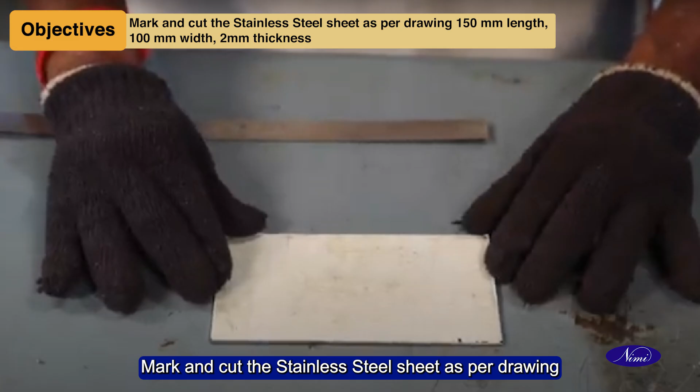In this topic, we will learn about how to deposit bead on stainless steel sheet in a flat position. Objectives. At the end of this exercise, you shall be able to mark and cut the stainless steel sheet as per drawing: 150 mm length, 100 mm width and 2 mm thickness.

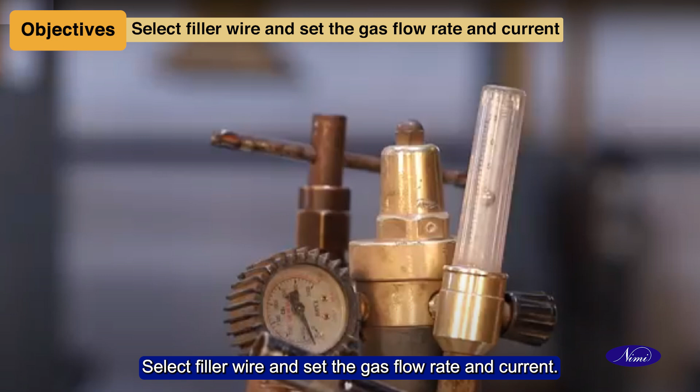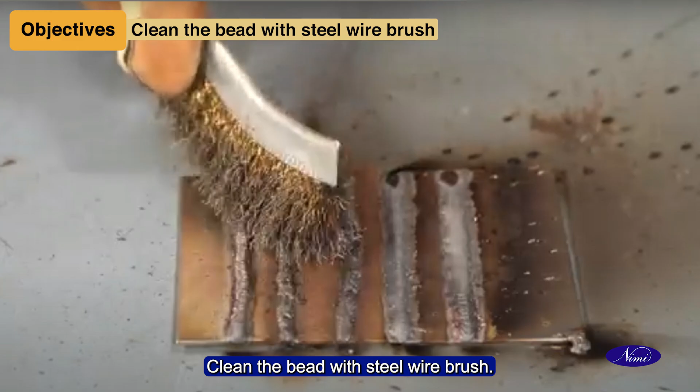Select filler wire and set the gas flow rate and current. Deposit the bead with weaving technique. Clean the bead with steel wire brush. Inspect the weld for any surface defects.

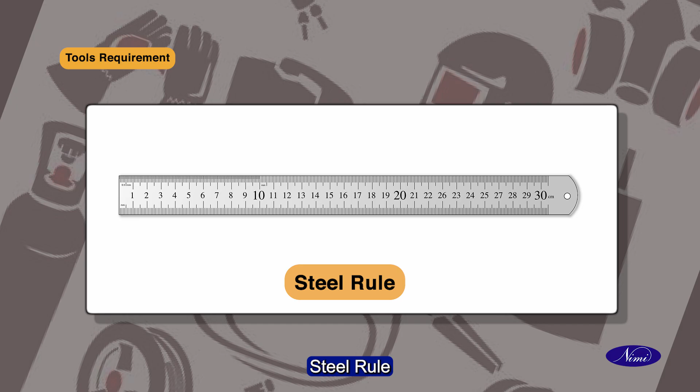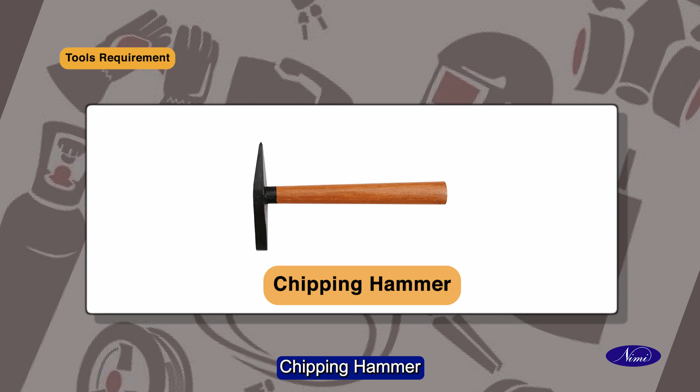Tools required for depositing bead on the stainless steel sheet in a flat position: steel rule, ball peen hammer, half round file, tri-square, tongs, chipping hammer, steel wire brush, personal safety equipment, key or

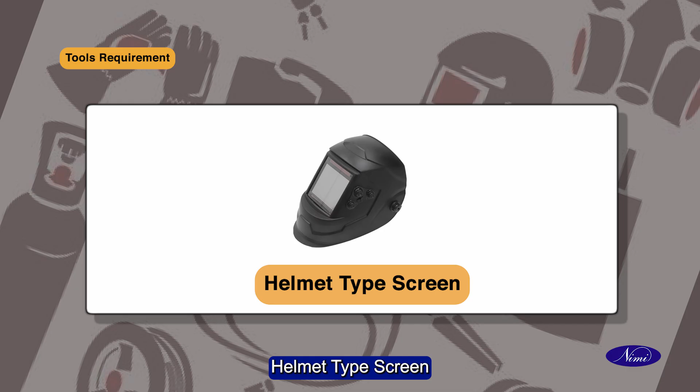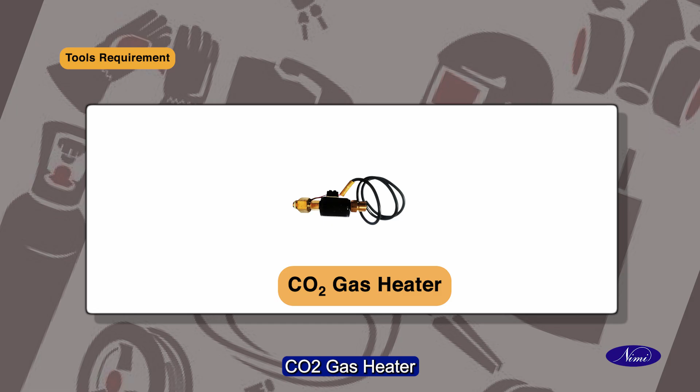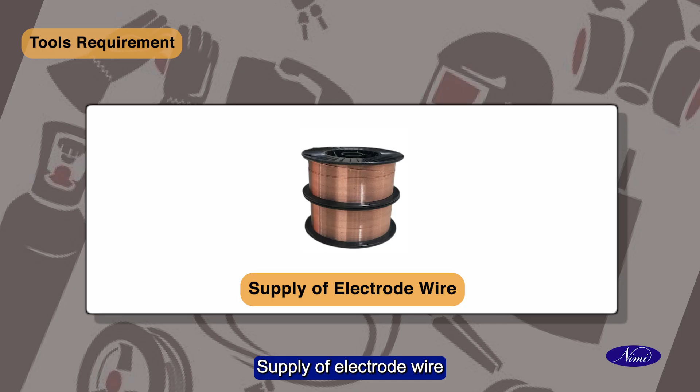spanner, helmet type screen, angle grinder, gas regulator with preheater and flow meter, CO2 gas heater, shielding gas hoses, welding power source, wire feeder, supply of electrode wire, welding gun, shielding gas cylinder, CO2, stainless steel sheet 2 mm thickness.

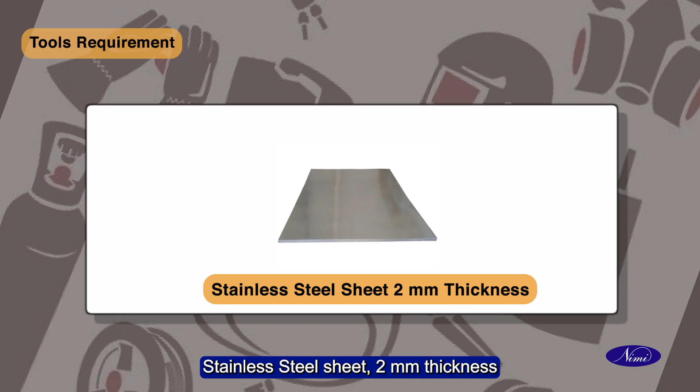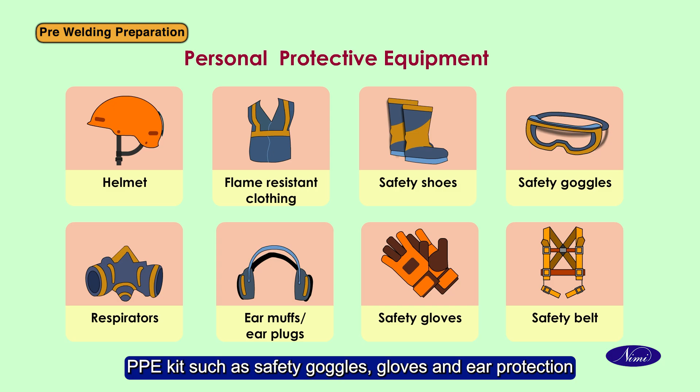Now, let us see the preparations for depositing bead on the stainless steel sheet in a flat position. Pre-welding preparation. Wear appropriate personal protective equipment, PPE kit, such as safety goggles, gloves and ear protection to safeguard against potential hazards. Ensure you have a well-lit and adequately ventilated workspace.

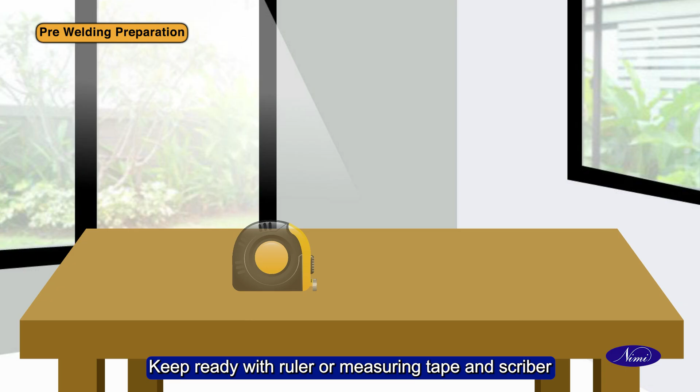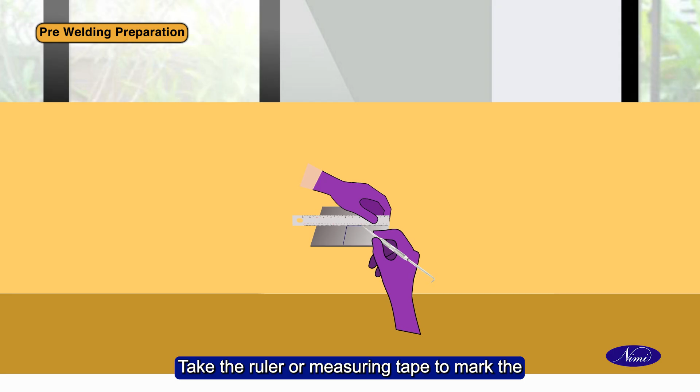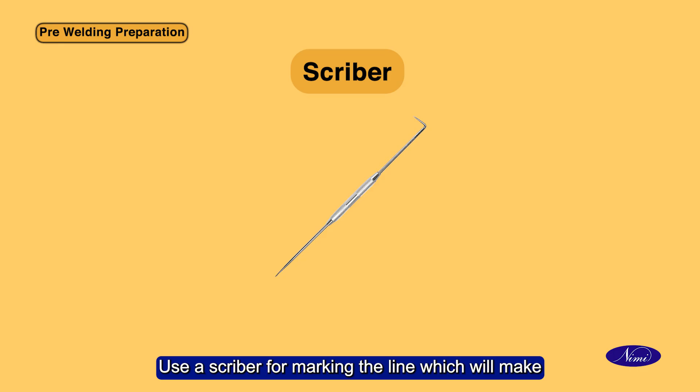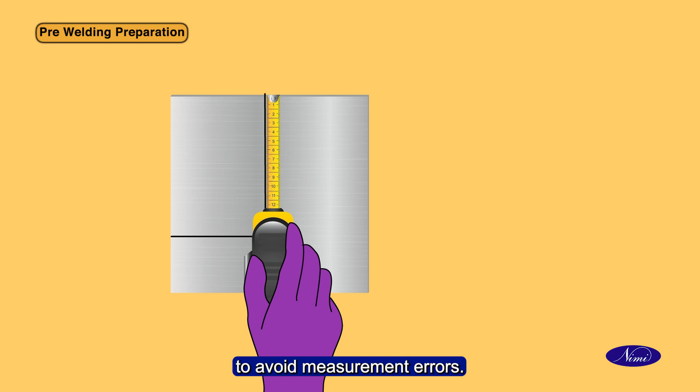Keep ready with ruler or measuring tape and scriber on the welding table for taking measurement for cutting. Take the ruler or measuring tape to mark the desired cutting line, 150 mm length, 100 mm width, accurately on the stainless steel sheet 2 mm thick. Use a scriber for marking the line, which will make a good impression on the 2 mm stainless steel sheet. Double check the measurements to avoid measurement errors.

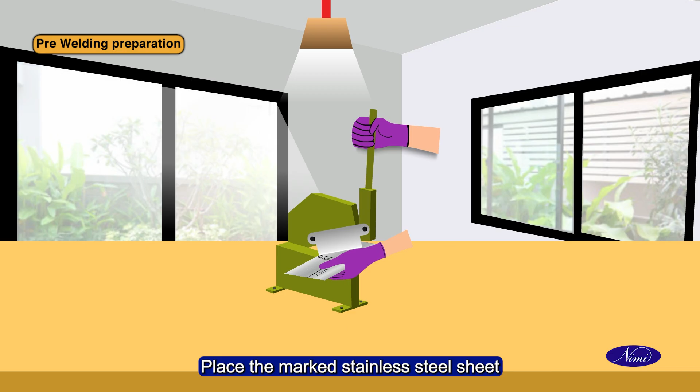Place the stainless steel sheet on a welding table. Place the marked stainless steel sheet on the shearing machine. Keep the hand shearing machine aligned with the marked cutting line as you continue to apply pressure. File rough edges if needed to achieve a clean and even finish.

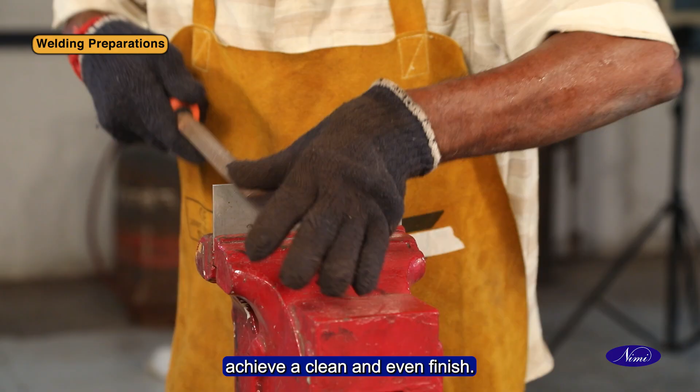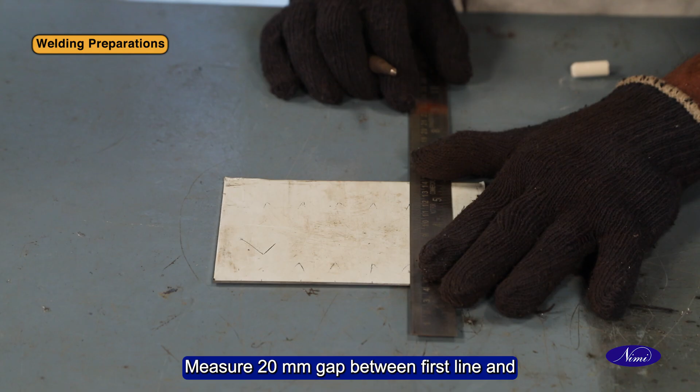Start marking parallel lines by leaving 25 mm on either end of the sheet. Draw the first line using a scriber. Measure 20 mm gap from the first line and mark the second line using a scriber. Follow the same process of maintaining 20 mm gap between lines and draw 3 more lines. Totally 5 lines have to be marked.

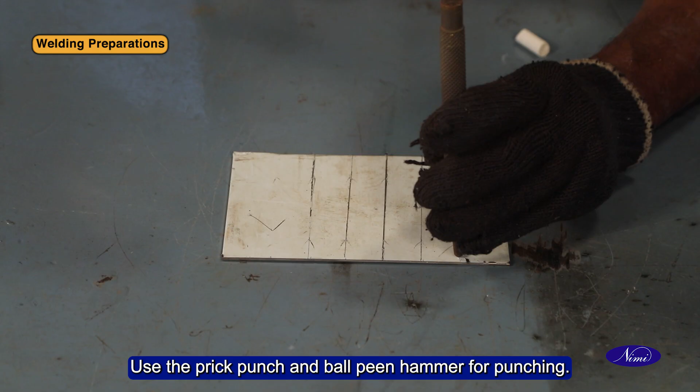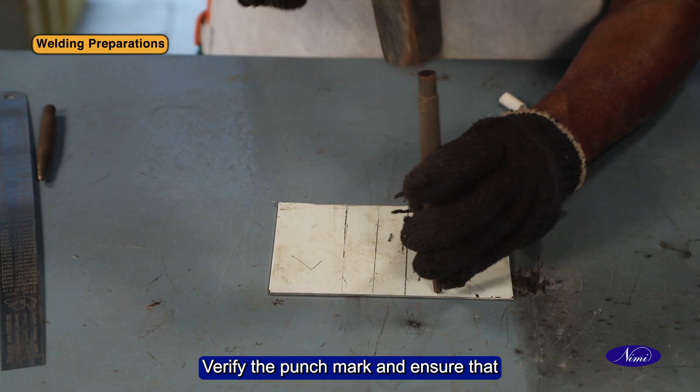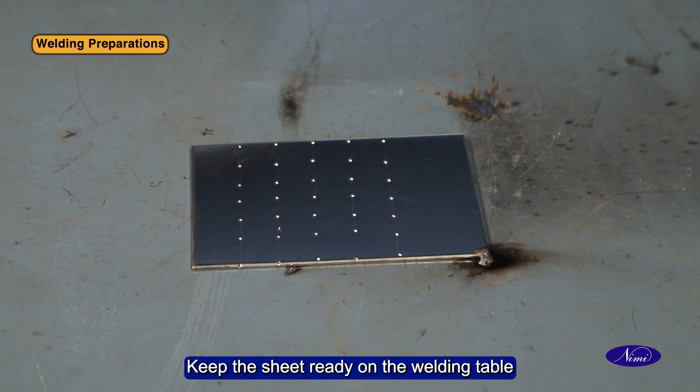Use the prick punch and ball peen hammer for punching. Start making the punch marks using the prick punch and hammer by maintaining a 4 mm gap between the punch marks. Verify the punch marks and ensure that all the punches are made correctly. Keep the sheet ready on the welding table to start the welding process.

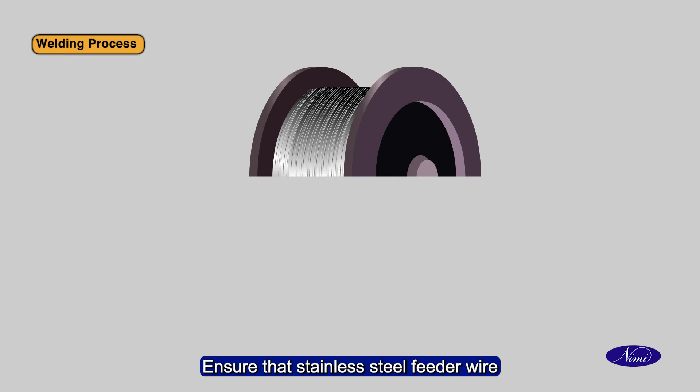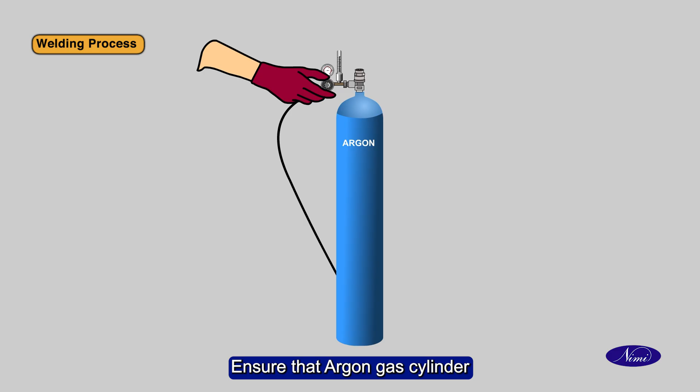Start setting up the GMAW machine. Ensure that stainless steel feeder wire with correct diameter is taken. Fix the 0.8 mm diameter stainless steel wire spool in position, lock it up and pull the wire through the guide tube, rollers, spiral and contact tip of the torch. Ensure that argon gas cylinder is fitted with flow meter.

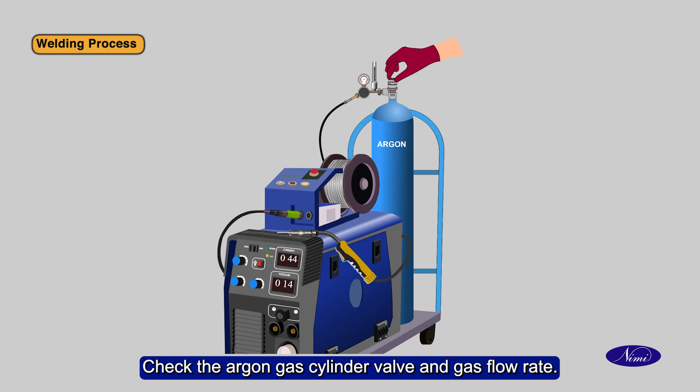First, check the power supply of the GMAW machine. Check the argon gas cylinder valve and gas flow rate. Check the wire feeder machine for the correct speed. Set up the welding torch with accessories.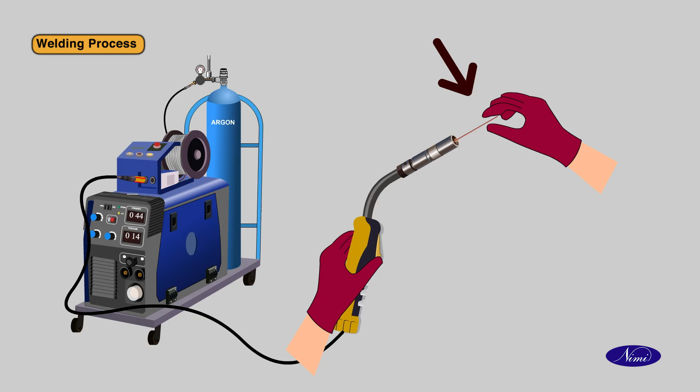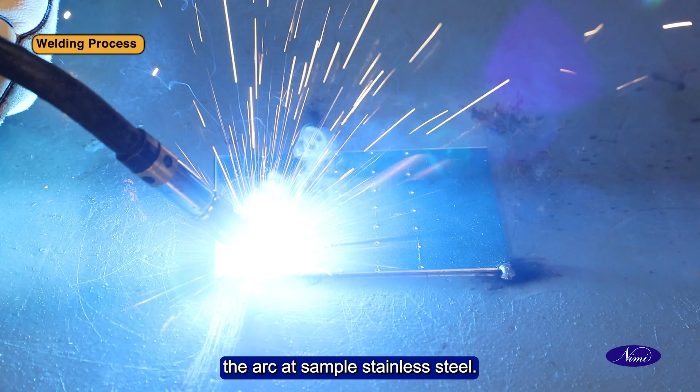Check the filler wire feeder on the welding torch. Ensure that the GMAW machine is working fine. Start the welding process by striking the arc on sample stainless steel. Check the straight bead on the sample stainless steel sheet.

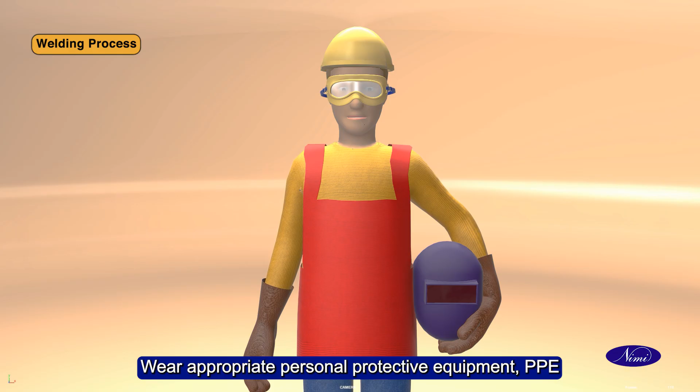Now, let us see the welding process for depositing bead on the stainless steel sheet in a flat position. Wear appropriate personal protective equipment, PPE, such as safety goggles, gloves, and ear protection to safeguard against potential hazards.

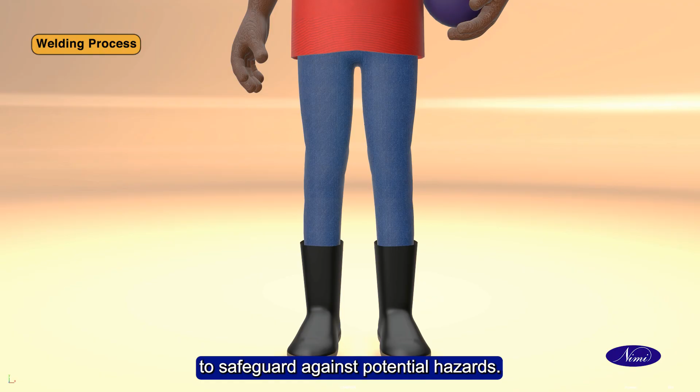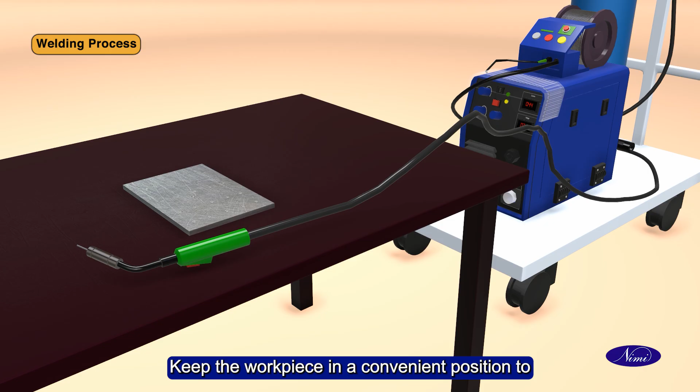Set the workpiece on the work table in a flat position. Keep the workpiece in a convenient position to carry out welding in downhand position.

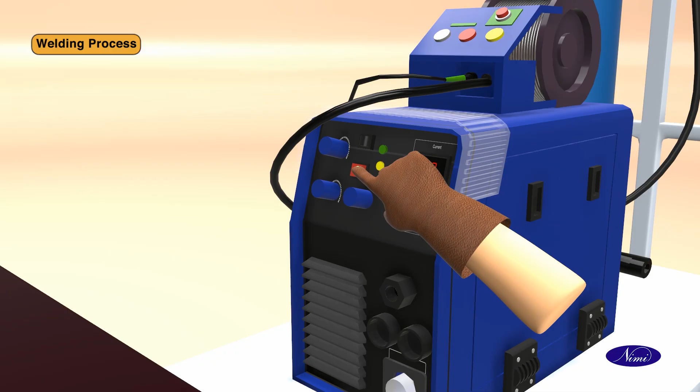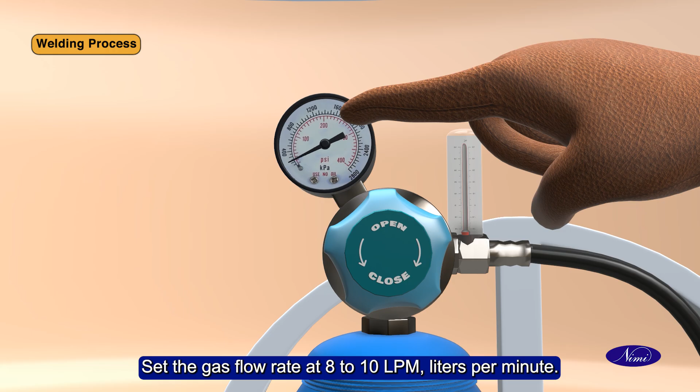Switch on the welding machine. First, check gas flow while starting the welding. Adjust the gas flow according to the specified flow rate. Set the gas flow rate at 8 to 10 LPM, liters per minute.

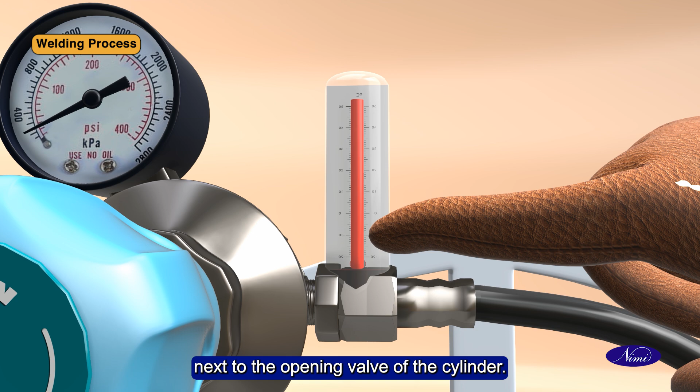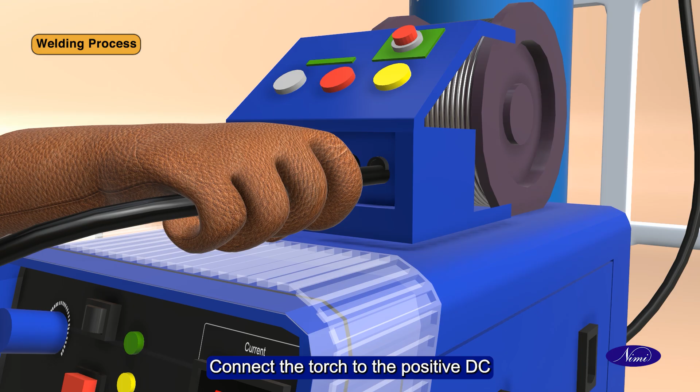See the flow rate in the flow rate tube next to the opening valve of the cylinder. Ensure that flow rate is correctly set for the welding process. Connect the torch to the positive, DC positive terminal, DC RP of the machine.

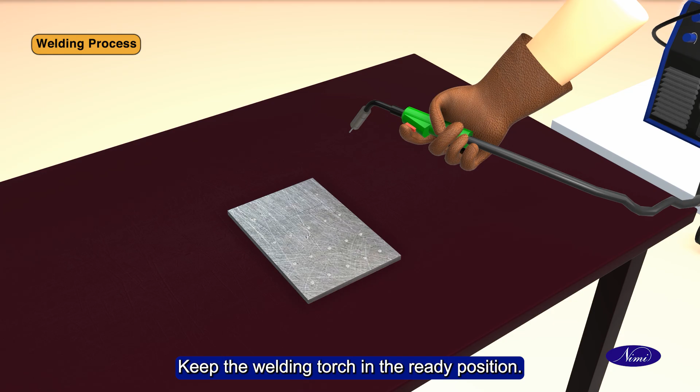Keep the welding torch in the ready position. Hold the torch in the right hand and keep the index finger on the press button of the welding torch. Slowly press the wire feeder button in the welding torch and check if the wire is coming out at a

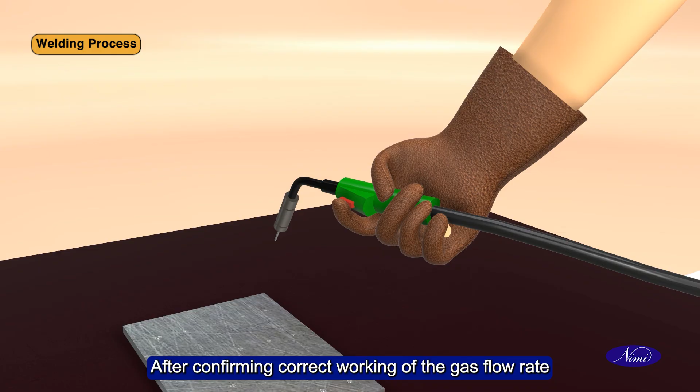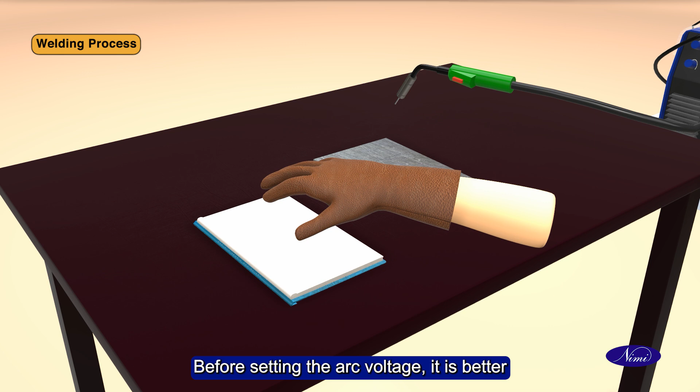constant speed. After confirming correct working of the gas flow rate and wire feeder rate of the machine, we have to start setting the voltage for the welding process. Before setting the arc voltage, it is better to see the guideline or user manual for setting arc voltage for

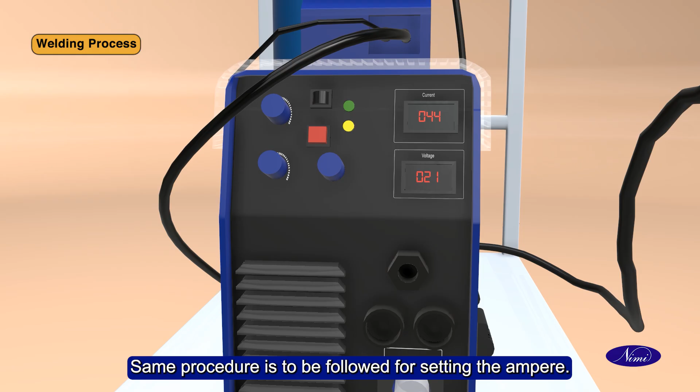welding stainless steel sheets. Same procedure is to be followed for setting the ampere. See the guidelines or user manual for setting ampere for welding stainless steel sheets. Set the arc voltage at 19 to 21 volt as required for dip transfer mode.

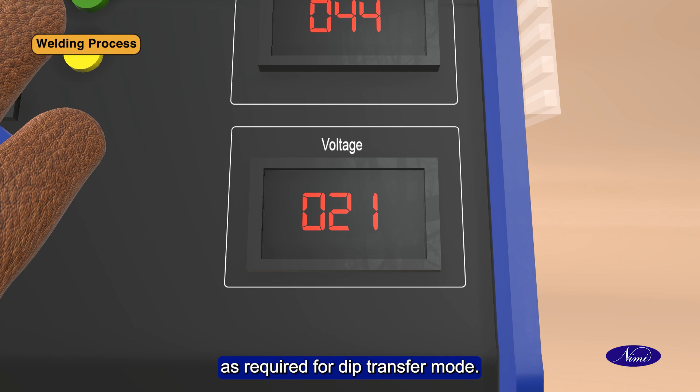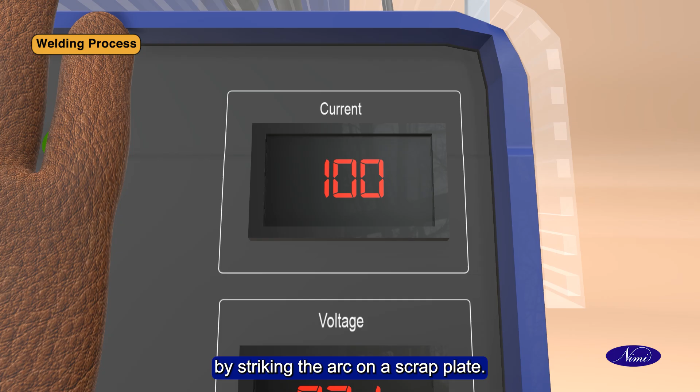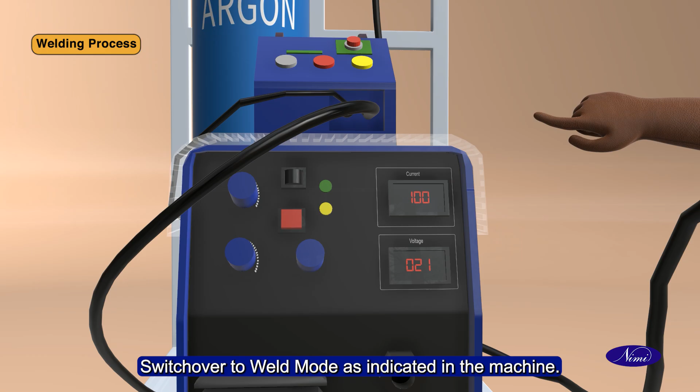Set the wire feed rate so as to get 90 to 100 ampere by striking the arc on a scrap plate. Use DIN 11 or 12 black or green filter glass on hand shield or helmet for the above current setting. Switch over to weld mode as indicated in the machine.

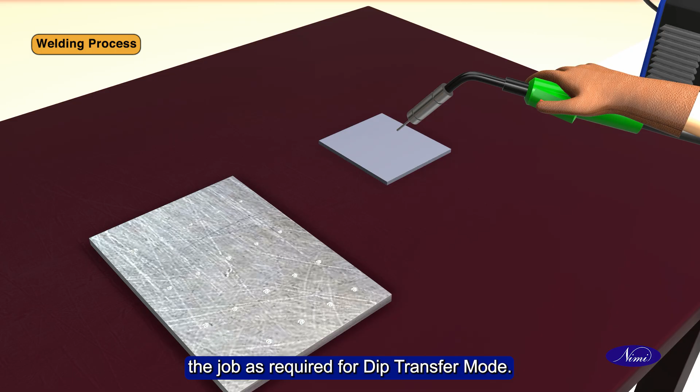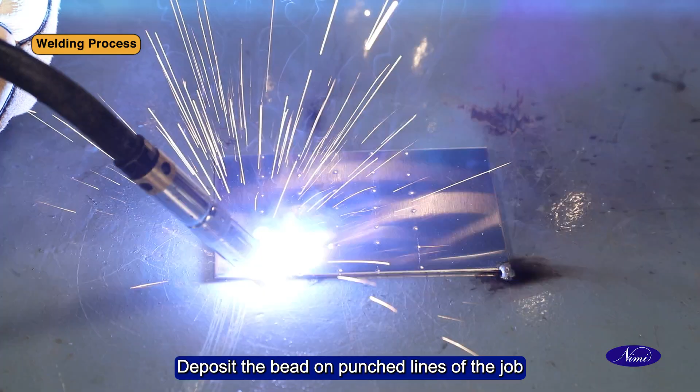Strike the arc. Maintain a filler wire stick out of 8 to 10 mm from the end of the contact tip to the job as required for dip transfer mode. See the punched marks of the sheet and place the welding torch on the first line. Deposit the bead on punched lines of the job from one end to another end using weaving technique.

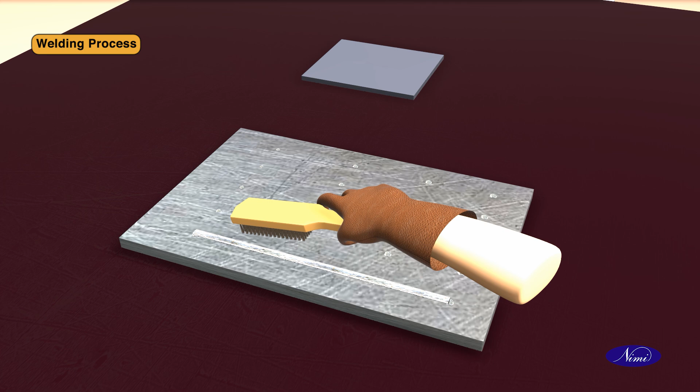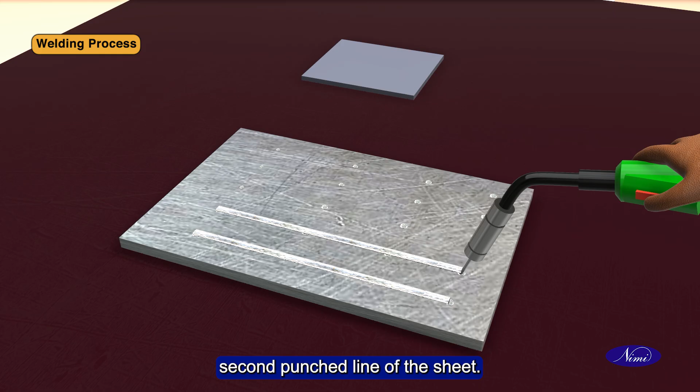Clean the weld with steel wire brush and remove the debris. Start depositing the bead on the second punch line of the sheet. Ensure that the welding torch is moved at constant travel speed.

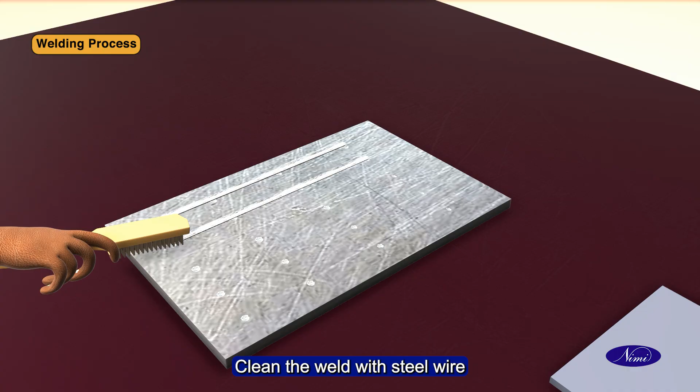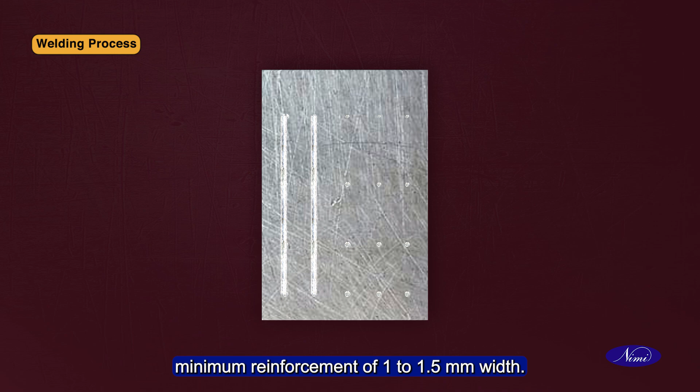Clean the weld with steel wire brush and remove the debris. Maintain a straight bead of minimum reinforcement of 1 to 1.5 mm width. Start depositing the bead on the third punch line of the sheet. Ensure that sheet is not getting heated up to avoid the distortion.

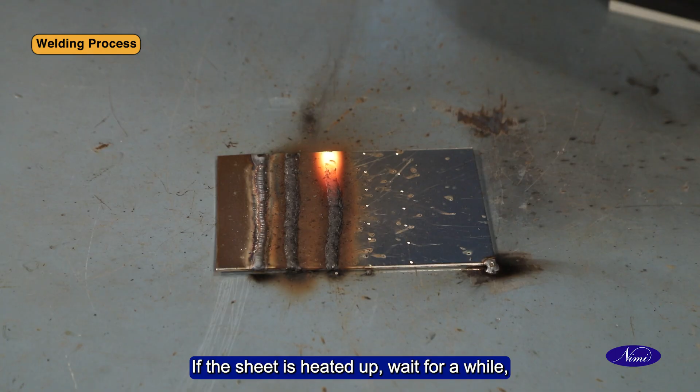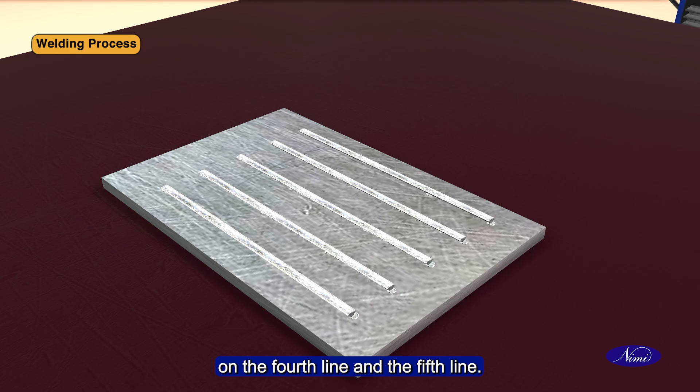If the sheet is heated up, wait for a while, let the sheet cool down. Then start depositing the weld beads on the fourth line and the fifth line. Clean weld joint using carbon steel wire brush. Inspect the weld bead for any surface defects.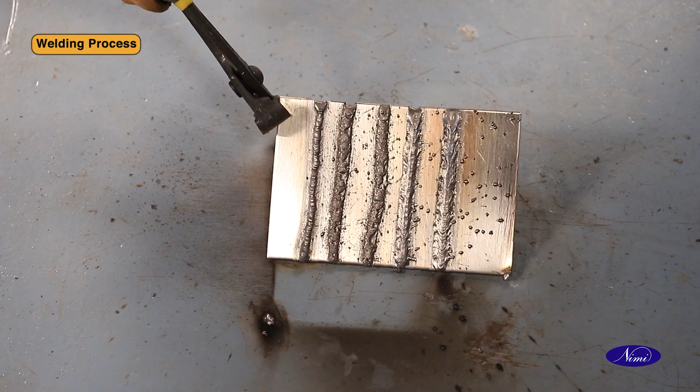Let us now see the defects. Blowholes, uneven bead, excess reinforcement, spatters, craters.

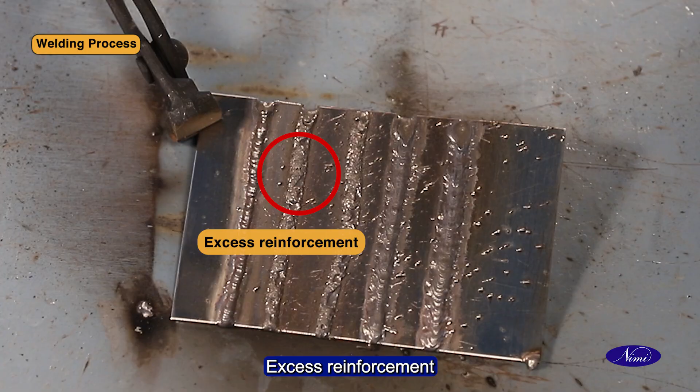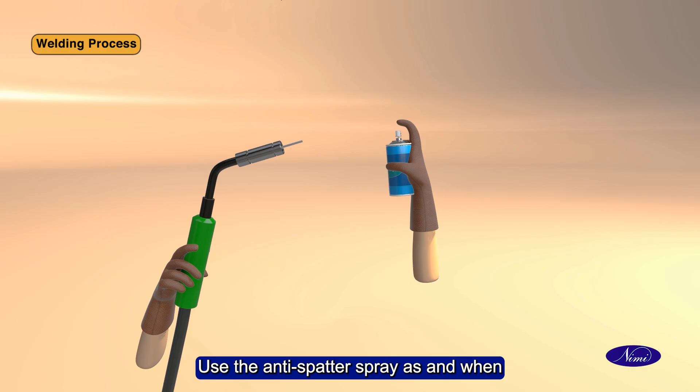Safety procedure to be carried out by welders. Use the anti-spatter spray as and when the torch nozzle gets clogged with weld spatters. Note that if this is not done, the wire feed may be irregular, causing an unestablished arc.

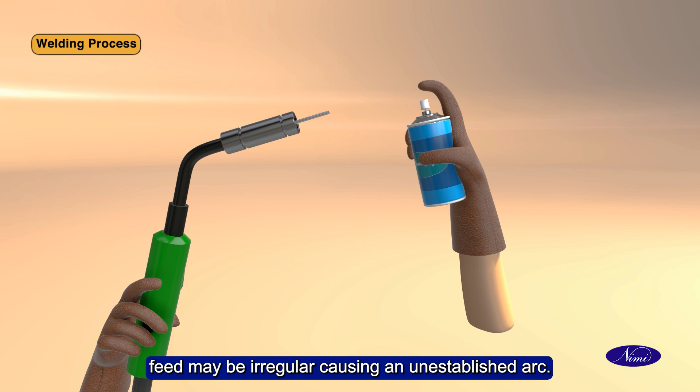Recap. In this topic, we have learned to mark and cut the stainless steel sheets as per drawing, 150 mm length and 100 mm width and 2 mm thickness. Select filler wire and set the gas flow and current. Deposit the bead with weaving, clean the bead with steel wire brush. Inspect the weld for any surface defects. I hope you all understood the performance of depositing bead on the stainless steel sheet in a flat position.